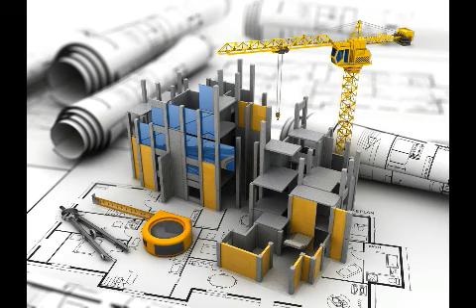An analogy-based solution to the markup estimation problem. A methodology is presented that can be used to develop a practical model, including model design, training, testing, and generalization improvements.

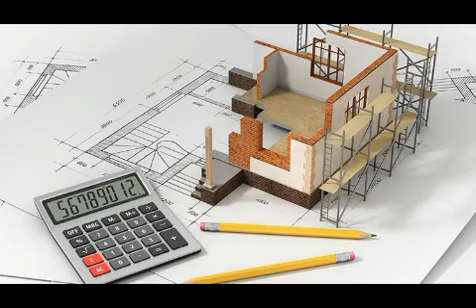For an industrial process plant, this decision is based on several decision attributes divided into categories: plant location, environmental and organizational, labor related, plant characteristics, and project risks. The performance of the trained neural network system is compared with recommendations provided by human experts.

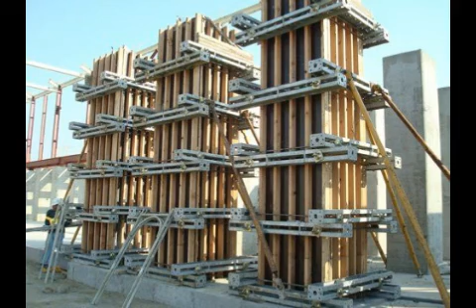Neural network system for vertical formwork selection. Neuroform is a computer system that provides selection of vertical formwork systems for a given building site. The selection of an appropriate neural network model, its architecture, representation of network training examples, and the network training procedures can be described.

A statistical hypothesis test can be conducted on the recommendations of Neuroform when partial inputs are given, which demonstrates the system's fault tolerant and generalization properties.

Belief networks for construction performance diagnostics. Belief networks are a form of artificial intelligence that incorporates uncertainty through probability theory and conditional dependence. A belief network can be developed by first defining the variables in the domain and the relationships between those variables.

An automated approach for improvement of construction operations involves integrating belief networks with computer simulation. Computer simulation is used to model the construction operations and also to validate changes to the operation recommended by the belief network.

Building a knowledge-based expert system for diagnosing pre-stressed concrete piles with artificial neural networks. Diagnosis of damage to pre-stressed concrete piles during driving is an important problem in foundation engineering. The backpropagation learning algorithm can be employed to train the network for extracting knowledge from the trained examples.

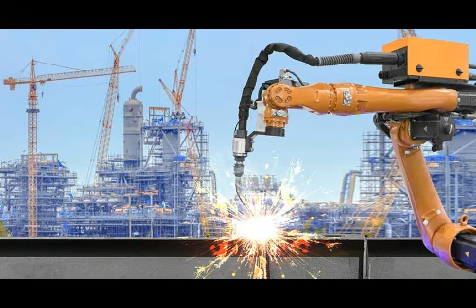Construction robot fleet management system. The application of robotic equipment to the execution of construction tasks is gaining attention from researchers and practitioners around the world. Several Japanese construction firms have already developed their own fleet of construction robots.

The utility of this system lies in optimizing robot performance of work tasks across as many construction projects in a contractor's portfolio as possible. Thus, economic benefits of robot use can be achieved more easily, robot development costs can be recovered faster, and robot use can be distributed over more applications and types of construction tasks.

Modeling the initial design process using artificial neural networks. The preliminary design model is of vital importance in the synthesis of a finally acceptable solution to a design problem. The initial design process is extremely difficult to computerize because it requires human intuition.

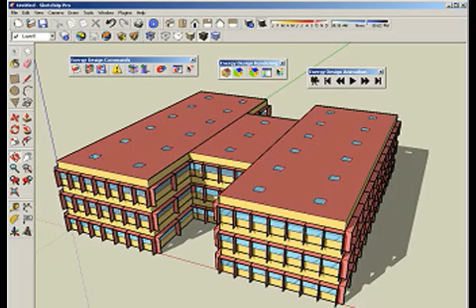The development of a network for the initial design of reinforced concrete structures can be enhanced with artificial neural networks. The network predicts a good initial design, and various stages of development and performance evaluation are assessed with respect to rate of learning, fault tolerance, and generalization.

Intelligent planning of construction projects. Knowledge representation and reasoning techniques derived from artificial intelligence research permit computers to generate plans, not merely analyze plans produced by humans. They explicitly represent knowledge about how to generate plans in the form of initial and goal states, and descriptions of actions along with their preconditions and effects.

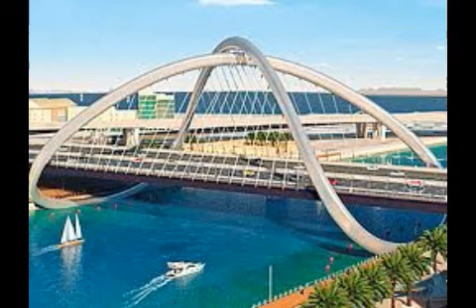Bridge planning using GIS and expert system approach. In the planning process of a new road network, the planner should consider possible locations of bridges and tunnels. The selection of the best alignment requires investigating the effect of the location of each bridge on the bridge type that fits its location.

This task has not been done so far because of the large volume of data needed and the complicated interaction between many factors. Considering this task in the early stage of road alignment planning can result in a more rational design. Geographic information systems and expert systems are proposed as two methodologies that can help in comparing candidate sites and candidate types simultaneously.

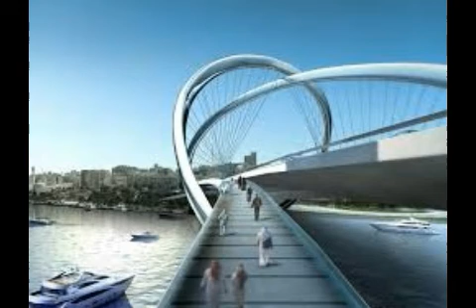With this computation power, quantitative comparison can be done faster and more precisely than with conventional simplified methods. This can result in improving the design of the road network in general, and in having bridges designed to meet the requirements of erection, maintenance, driving comfort, and landscape.

Next is the artificial neural network approach for pavement maintenance. The main objective is to assist decision makers in selecting an appropriate maintenance and repair action for a defected pavement. This can typically be performed through collecting condition data, analyzing it, and selecting appropriate maintenance and repair actions.

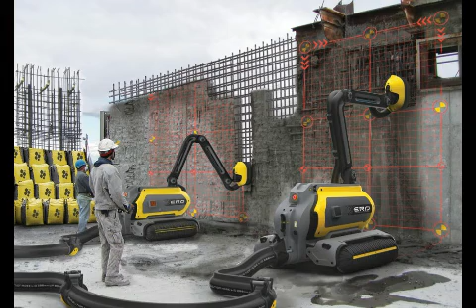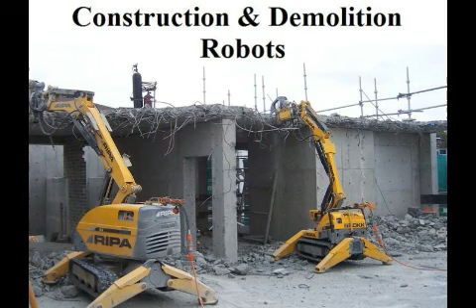Artificial neural network for environment health safety. There are multiple areas where artificial intelligence can contribute. When robots carry out tasks in construction, human errors can be minimized. Tidal forecasting: tidal level record is an important factor in determining constructions or activity in marine areas.

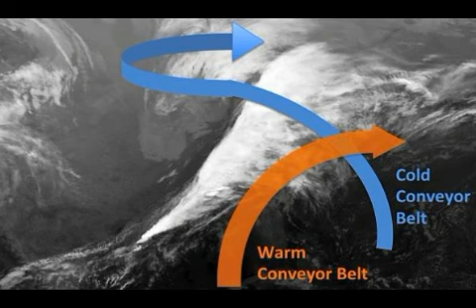Earthquake induced liquefaction. During the occurrence of earthquakes, numerous civil structures such as buildings, highway embankments, and retaining structures have been damaged or completely destroyed. The damage of civil structures occurs in two modes: the first is structural failure, and the second is foundation failure caused by liquefaction. Therefore, estimation of the earthquake induced liquefaction potential is essential for civil engineers in the design procedure.

Artificial intelligence immensely helps in the design of structures to safeguard against earthquakes. Expert systems and artificial neural networks are the best manifestations of artificial intelligence.

Expert systems are applicable to a wide range of tasks and many problems in the civil engineering domain, such as structural design, structural modeling, structural diagnosis, site investigation, estimation, scheduling, or other potential expert applications.

Developing an inference mechanism demands very high programming skills, particularly for developing a general expert system shell which can be used for diverse types of applications.

The developed expert systems eliminate the tedious procedure of referring to charts, graphs, and tables of IS codes, and help the user arrive at final quantities of cement, water, sand, and coarse aggregate per cubic meter of concrete.

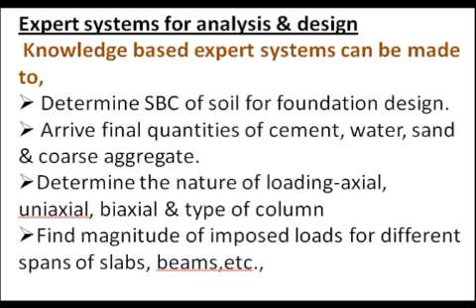Expert systems can also be used to find the magnitude of imposed loads for different spans of slabs, beams, etc. The development of knowledge based systems will not only permit the retention of expertise but also its logical extension, as well as access to the expertise by other structural engineers.

Developed expert systems for analysis and design, concrete technology, design of RCC, structural steel components, and the use of artificial neural networks in non-destructive testing can also be enhanced.

Developed expert systems in the field of concrete technology are not only used by engineers during laboratory work but also used in the commercial testing of material.

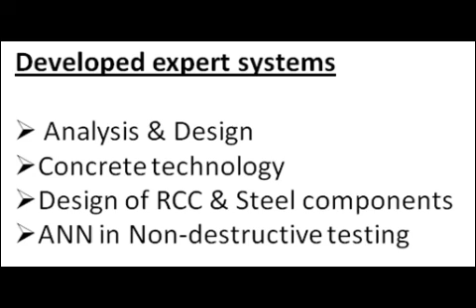The development of knowledge based systems will permit not only the retention of expertise but also its logical extension, as well as access to the expertise by other structural engineers.

Artificial neural networks are defined as systems that solve complex problems for which there doesn't exist sequential algorithms, only examples of solutions, and which generate their own rules of learning.

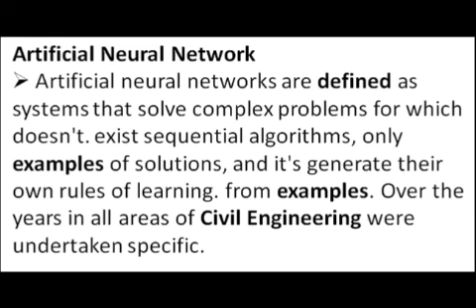Artificial intelligence can also be used to solve problems in the field of building materials and their behavior, geotechnical engineering, structural identification and control, heat transfer problems, transport infrastructure issues, and management and technology in construction and installation issues.

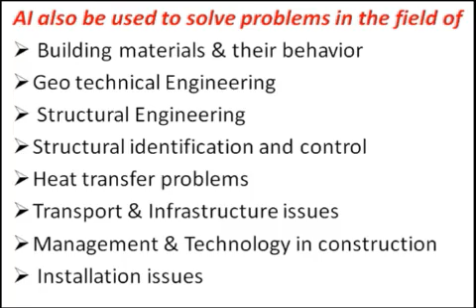Artificial neural network in non-destructive testing. The artificial neural network in non-destructive testing enhances the behavior of structural members with and without reinforcement, and also enhances the behavior of structures with different types of reinforcement.

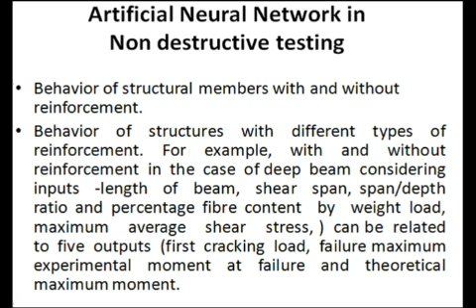For example, with and without reinforcement in the case of a deep beam, considering the input as its length, shear span, span by depth ratio, and percentage of fiber content, etc., can be related to give five outputs, for example, maximum experimental moment at failure and theoretical maximum moment.

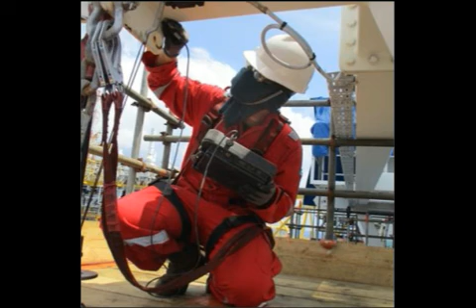To facilitate rapid assessment of flexural behavior, multi-layer feed-forward artificial neural networks can be trained to learn the relationship between input and output data generated from the available experimental data. The error correcting backpropagation algorithm can also be used to map this relationship.

Application of artificial intelligence using artificial neural networks in the civil engineering field: designing, planning, construction and management of infrastructures, and estimation of buildings.

Artificial intelligence in structural design. Design can be viewed as the general process in which an idea is developed into detailed instructions. The activities that follow can be grouped into four phases: synthesis, analysis, evaluation, optimization.

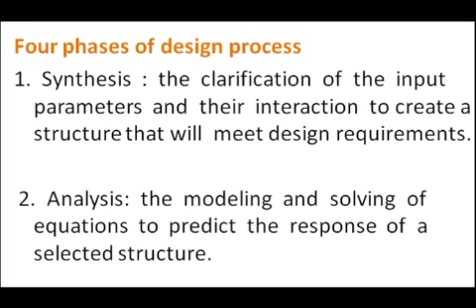Synthesis: the clarification of the input parameters and their interaction to create a structure that will meet design requirements. Analysis: the modeling and solving of equations to predict the response of a selected structure. Evaluation: the activity of placing a worth on the structure, where worth may be cost, safety, or energy consumption. Optimization: the search over the range of possibilities of improving the design as much as possible.

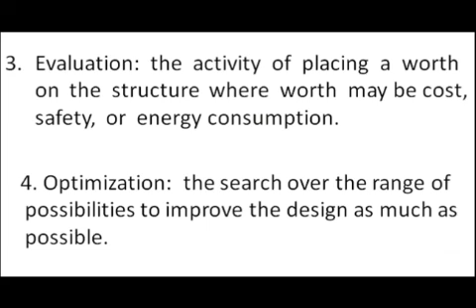Today, CAD in structural engineering involves almost exclusively analysis, proportioning of structural components, and production of drawings and schedules. There are very few applications to conceptual and preliminary design. Conceptual and preliminary designs are considered the creative aspects of design.

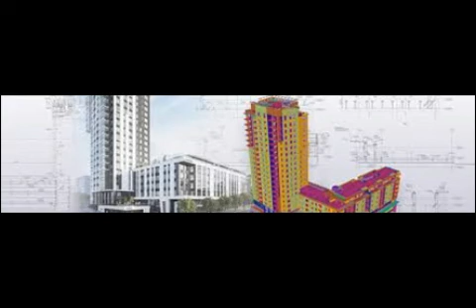Yet, generally, the preliminary design process is not new design but redesign, where redesign involves the application of existing structural ideas to a particular design. New design implies the development of a new structural configuration, for example, new concepts in structural design. Redesign actually is the application of a set of rules to assign values to predefined variables.

Thus, it appears that the preliminary structural design process may be placed in a knowledge-based system where if-then rules are used to instantiate values in a data structure.

A knowledge-based program is developed using the knowledge of experts. Once a program is developed, there should be close interaction between the designer and the computer. The computer should be able to respond to queries on the design process as well as accept additional information.

Since a design prepared by the computer follows a limited number of rules, close supervision by the designer is necessary. In this way, the designer will realize inadequacies in the existing set of rules and make revisions or additions to the rules when necessary.

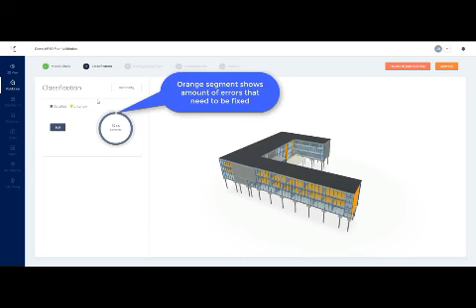As you can see, the majority of the elements have already been classified. We can modify or amend them. If we click on edit, we will access the specific menu of the classification.

For example, select one item of the model which has not been classified yet, and we'll see that the machine gives us a level of high strength concrete. We can select this one from the list and assign it directly.

If we do the same steps, the calculation will be just as accurate.

Artificial neural network in high-rise buildings. The need for high-rise buildings is increasing in order to meet the challenges posed by rapid urbanization and the exponential growth in population. With recent advancements in computing technologies, innovative materials, and new structural systems, the need for prior knowledge about proportioning the geometry and configuration of structural members is also increasing.

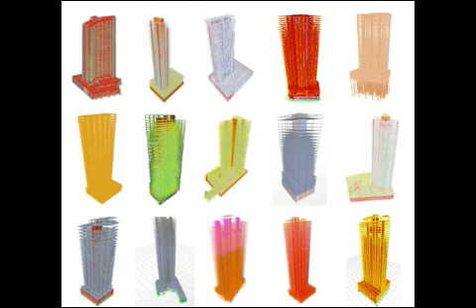A relatively quicker and reliable estimation of approximate sizes of members can greatly facilitate the preliminary design and feasibility of the project. The construction of taller structures becomes more challenging with increasing height. Serviceability, strength, and sustainability of a tall building are the most important parameters to be considered during building construction, which can be obtained by detailed analysis and design process.

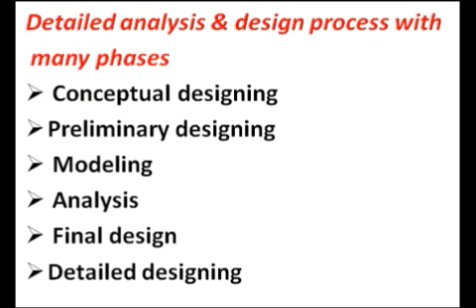These processes are divided into many phases such as conceptual designing, preliminary designing, modeling, analysis, final design, and detailed designing. The preliminary design of tall buildings involves detailed mathematical justifications and expert knowledge. It is tedious and time-consuming work.

Hence, to overcome such issues and to utilize the experience-based knowledge obtained from available data, we can use the artificial neural network. An artificial neural network is a type of machine learning tool which consists of a massive parallel computational model that imitates the function of a brain. It uses a learning algorithm to model and save knowledge in weighted connections.

Artificial neural networks have been used in many structural engineering related works in the past, such as structure control using neural networks, predicting dry shrinkage of concrete using neural network approaches, and cost estimation of structural systems.

Implementation of artificial neural network in buildings. The neural network can be developed by structural engineers to perform preliminary design of buildings. They can feed in a set of input data, train the network, and then use it to predict the output for further unknown input data sets.

The input parameters can be taken from the architectural data of the building to predict the structural design of the building. The designer can select data from either performance-based design or code-based design to predict the building design of new buildings.

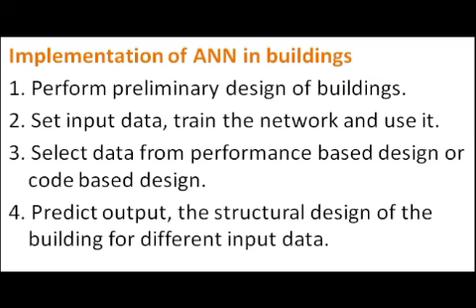Artificial intelligence for better design of buildings. Building information modeling can be used for better design of buildings. Building information modeling is a 3D model based process that gives architecture, engineering, and construction professionals insights to efficiently plan, design, construct, and manage buildings and infrastructure.

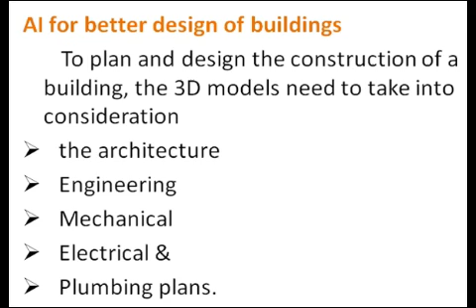In order to plan and design the construction of a building, the 3D models need to take into consideration the architecture, engineering, mechanical, electrical, and plumbing plans and the sequence of activities of the respective teams.

Project planning of buildings: the model allows construction planners to generate and evaluate optimal or near optimal construction scheduling plans that minimize both project time and cost.

Artificial intelligence also helps in the development of robots and automated systems. Even the role of artificial intelligence is also reported in the case of smart materials.

Artificial intelligence holds the key to solving late and over budget construction projects. It can assess endless combinations and alternatives based on similar projects. It aids in project planning since it optimizes the best path and corrects itself over time.

Artificial intelligence in architecture. Artificial intelligence will make an architect's work significantly easier by analyzing the whole data and creating models that can save a lot of time and energy of the architect.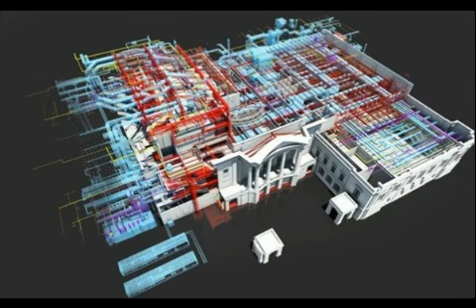Artificial intelligence can be called an estimation tool for various aspects while constructing a building. It will make the planning process of architects significantly easier, giving them access to countless amounts of data, creating models, interpreting the building environment, and creating cost estimates. All this information can be easily conveyed to the architect to help shorten design and building time.

Algorithms used by artificial intelligence report every flaw on the construction sites, as it can identify different buildings by their structure, size, and location.

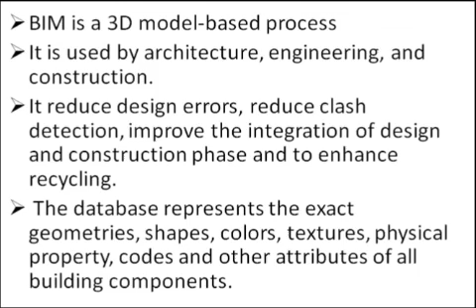The database represents the exact geometries, shapes, colors, textures, physical properties, codes, and other attributes of all building components. It portrays the connection between mechanical, electrical, and plumbing, heating, ventilation, and air conditioning systems of various structural components.

In a realistic construction pattern, the whole building project is first constructed visually to solve all possible installation problems, manage procedures, and conflicts before starting the actual construction. As a result, mistakes are avoided as they can be detected at an early stage.

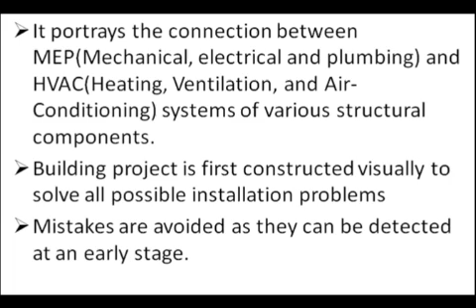These days, a growing number of architects, engineers, and contractors are using BIM, and here's why. Global trends are making AEC projects more complex, while advances in technology are helping industry professionals work more efficiently and effectively. This is where BIM comes in.

BIM is an intelligent model-based process that connects AEC professionals so they can more efficiently design, build, and operate buildings and infrastructure through BIM, or Building Information Modeling.

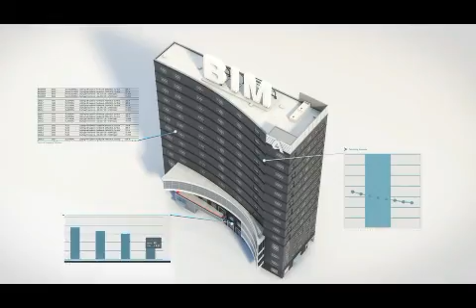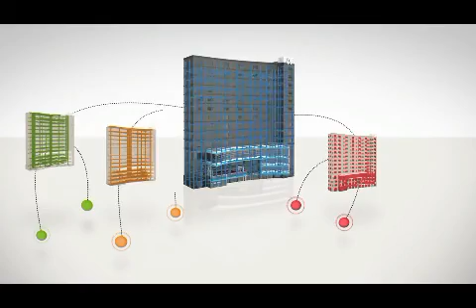With BIM, designers create digital 3D models that include data associated with physical and functional characteristics. The power of BIM is how it allows architects, engineers, and contractors to collaborate on coordinated models, giving everyone better insight into how their work fits into the overall project, ultimately helping them work more efficiently.

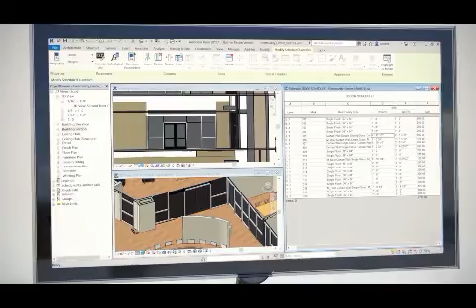The data in a model defines the design elements and establishes behavior and relationships between model components. So when an element in a model is changed, every view is updated, with the new change appearing in section, elevation, and sheet views.

You can use the information in the model to improve your design before it's built. Gain faster buy-in and approvals with realistic visualizations. Convey design intent to the field. And, most importantly, retain model intelligence from concept to construction.

BIM provides insight into a design's constructability, improving the efficiency and effectiveness of the construction phase, and also providing a better understanding of the building's future operations and maintenance. Owners can use BIM for predictive maintenance, asset tracking, and facilities management, and for future renovation or deconstruction projects.

When you work with BIM, you'll experience reduced project risk, improved timelines and cost savings, and better project outcomes. And the power of BIM is growing with cloud-connected technologies that let project teams design and work together in all new ways.

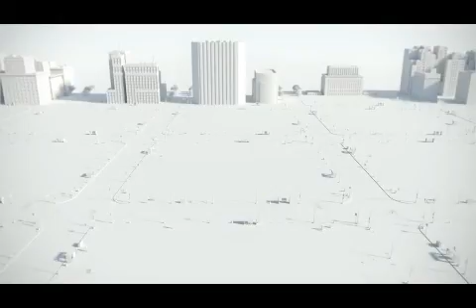Driven by global trends, the AEC industry is in a time of transformation. Businesses that want to win more work, deliver projects more efficiently, and design better buildings need a powerful solution. And that solution is BIM.

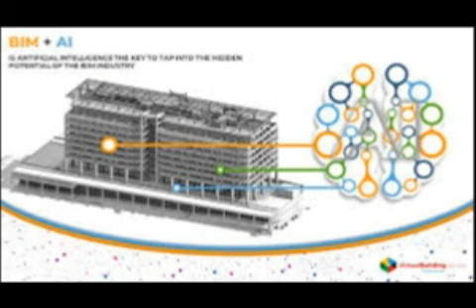Similarly, the software also finds elements of a building, for example windows, doors, slabs, stairs, and walls, by applying their attributes such as usage, structures, and functions. Further, it also predicts information such as the amount, expenses, schedules, materials, and can analyze data based on the structure and ambience.

Artificial intelligence in interior design of buildings.

Tasks in architectural and interior design range from defining the building floor plans and ensuring desired functionality to deciding the furnishing styles and arrangement choices. The process of design as a whole has remained hard to master for computer-based optimization in general, and for computational intelligence approaches in particular.

Drones, virtual reality, robots, lasers, artificial intelligence, 3D printing and scanning. How can all these new technologies help design the buildings of tomorrow? In search of answers, architects have teamed up with engineers, and their findings have been shared at this exhibition here in the capital of Denmark.

Hosted by the Danish Royal Academy of Fine Arts, the exhibition was organised around the work of 15 researchers who used the latest digital tools to explore new horizons in architectural design.

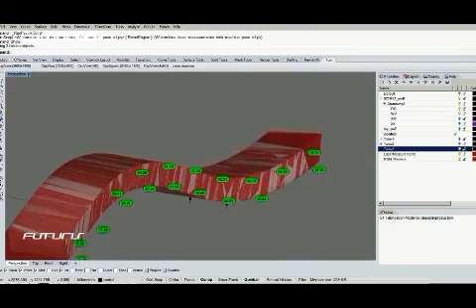Or energy in facades, thus providing a kind of environmentally friendly, energy-efficient, soft robotic skin for the future. And how can we safely, accurately bend glue-laminated timber to create new, unexpected architectural spaces? Motion capture techniques and 3D and laser scanning technologies were used to examine new wooden geometries and morphology.

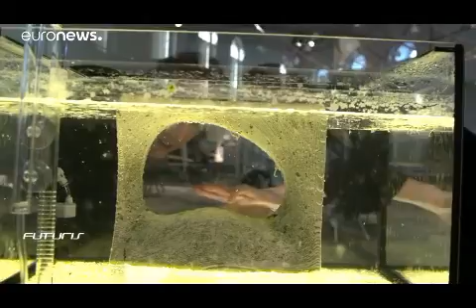The exhibition was the fruit of a European research project aimed at linking simulation, materials, and designs to imagine a future where more and more buildings will need to be built with fewer and fewer materials and in sustainable ways. Researchers say many of these solutions could be integrated into real buildings within 5 years.